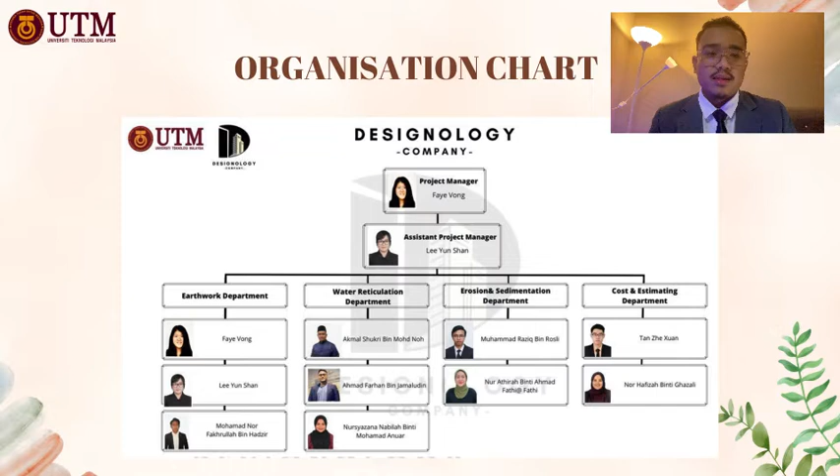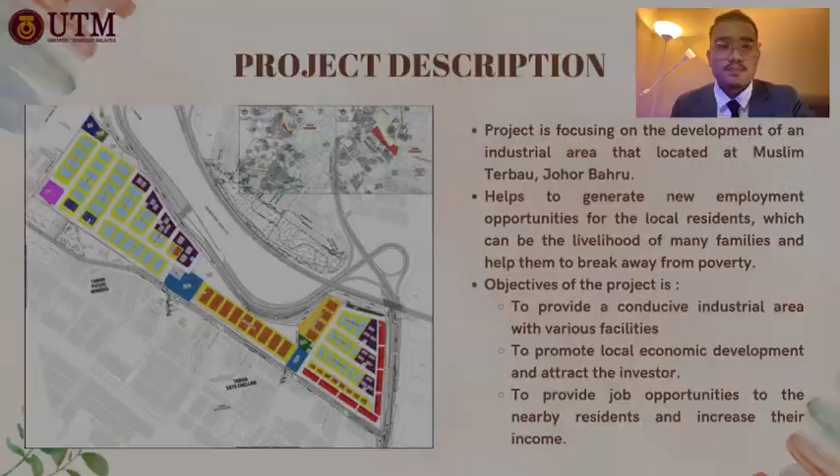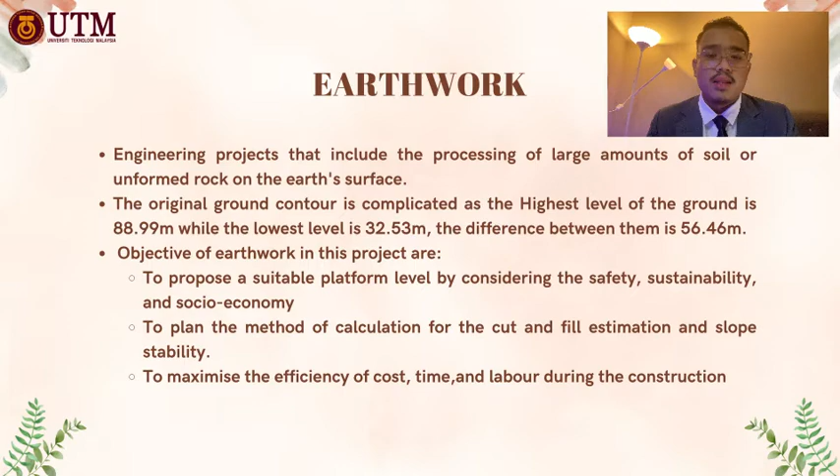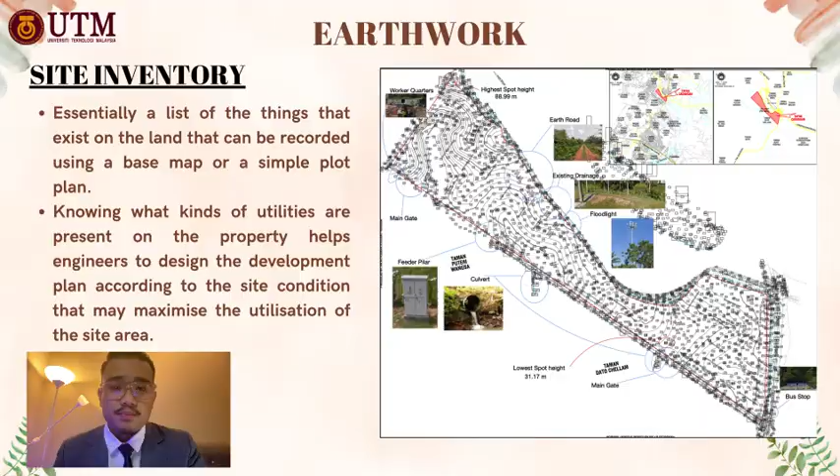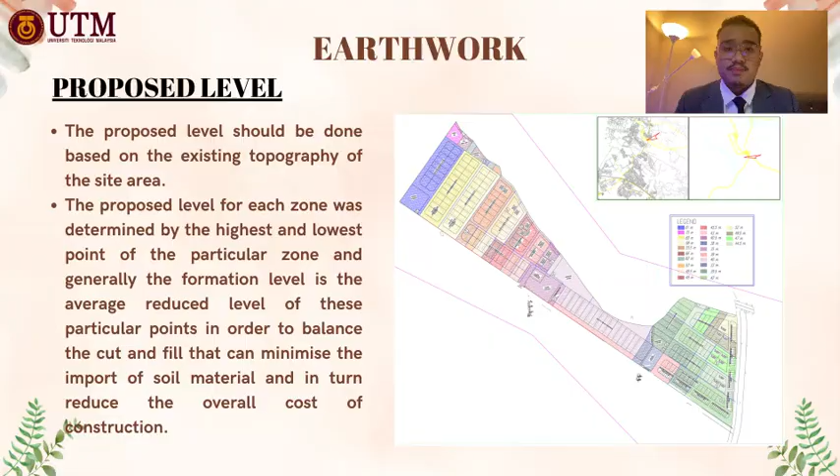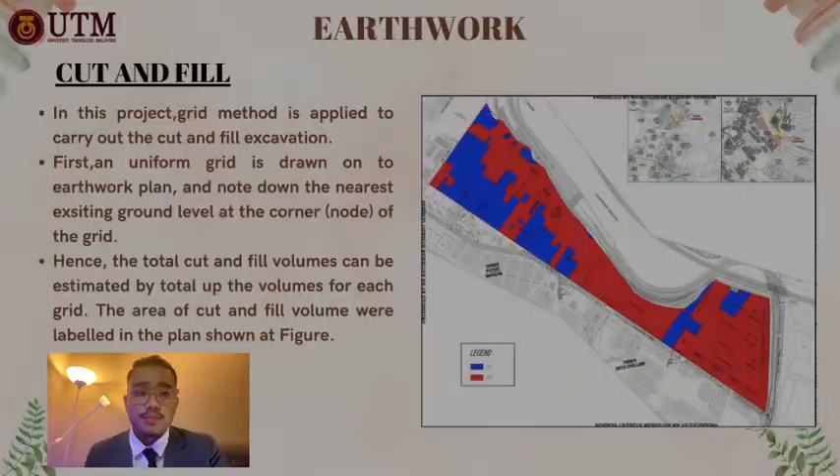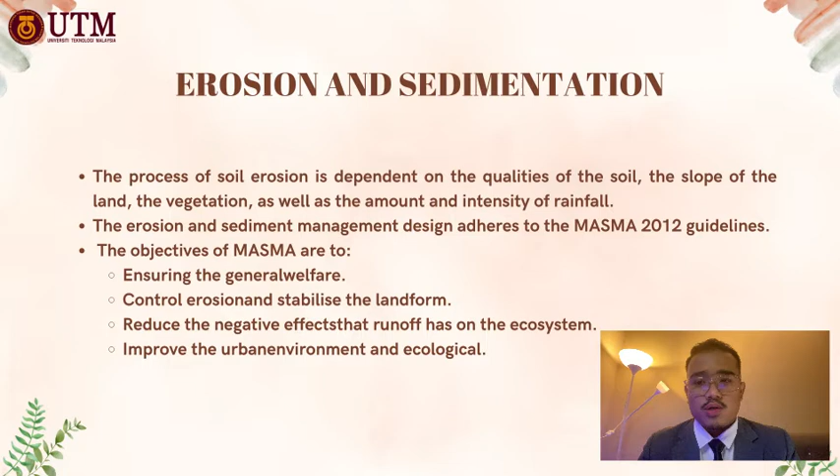The erosion and sediment management design adheres to the MASMA 2012 guidelines. The objectives of MASMA are to ensure general welfare, control erosion and stabilize the landform, reduce the negative effect that runoff has on the ecosystem, and improve the urban environment and ecology.

Temporary earth drainage design: a temporary earth drain shall be created prior to the start of earthwork to transport surface runoff water to a sediment basin or silt trap before discharge to the nearest public drain or river. The earth drain design should be suitable to prevent flooding. Depending on the geography and condition of the site, the actual drainage arrangement will be revised as needed.

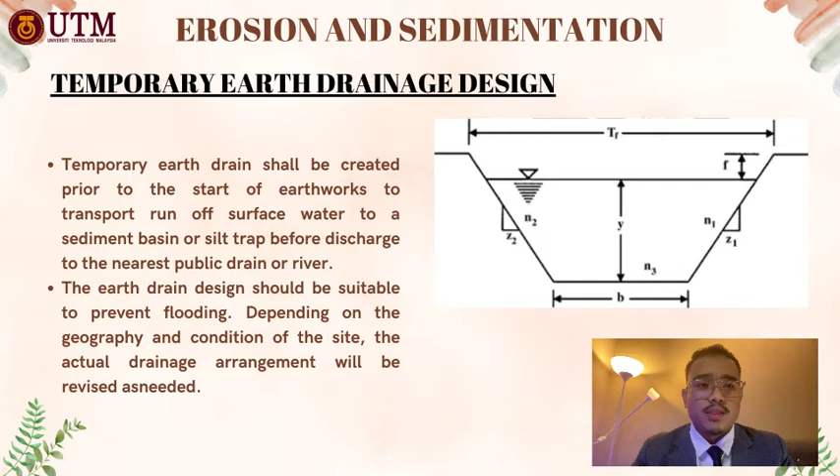Here is the layout for the temporary drainage. For sediment control, this construction site has a sediment basin, silt barrier and rock check dam. BMP for sediment control captures sediment on site and minimizes off-site transport.

It is necessary to place the sedimentation basin, also known as a sediment trap, downstream in order to catch the sediment conveyed by the temporary drainage system. In order to meet the demand on site, this must be meticulously planned.

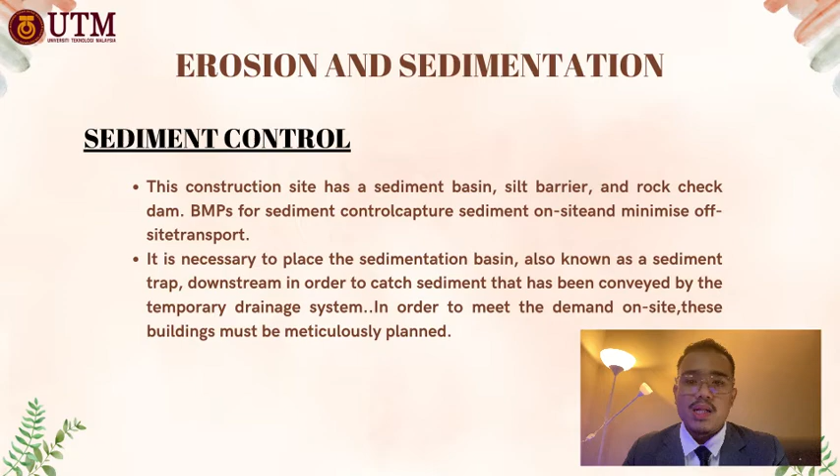For sediment yield estimation, the term sediment yield refers to the amount of sediment anticipated to be present at the termination point of the drainage system coming from the designated site. The outcome of this estimation is used to forecast the required quantity of sediment for sizing sediment control BMPs, as well as their ongoing maintenance.

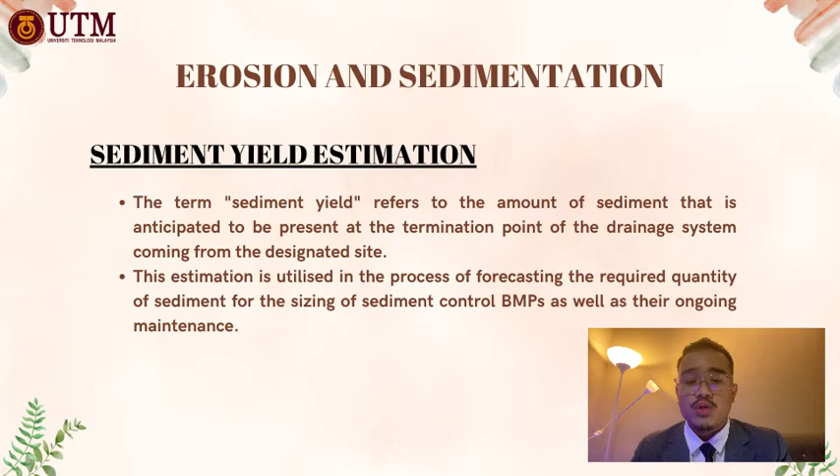For the sediment basin: a sediment basin is an ephemeral pond formed on a building site to catch eroded or disturbed soil during rainstorms and safeguard a nearby stream, lake, river or bay.

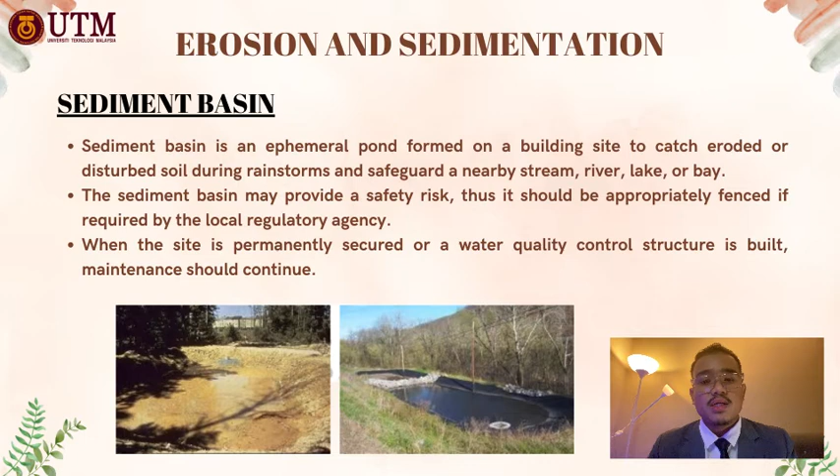The sediment basin may pose a safety risk, thus it should be appropriately fenced if required by the local regulatory agency. Maintenance should be continued until the site is permanently secured or a water quality control structure is built.

Now we move to the last department: cost and estimating. A project can only be completed with all the required material and labor, which costs money. It can be difficult to create a budget that minimizes costs while maximizing project quality and scope.

The objectives of cost and estimating in this project are to estimate the required total cost for earthwork, to work on an economical budget after applying value engineering, and to provide detail on equipment, machinery used, and the total labor for earthwork.

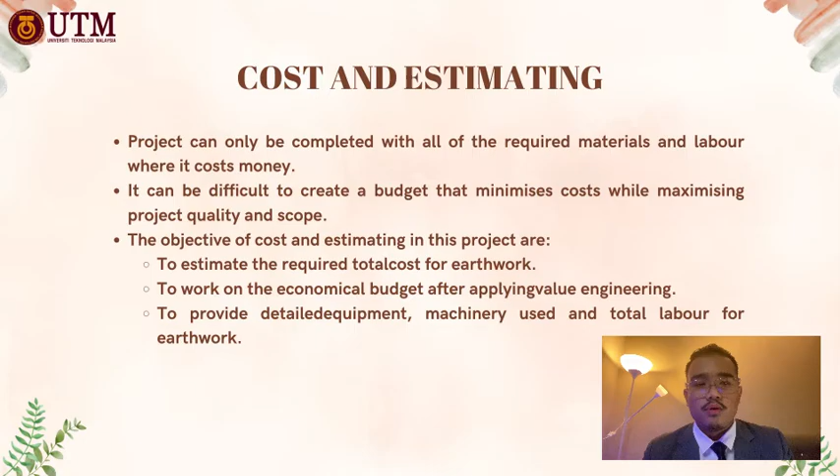In this cost and estimating section, we have a few parts, starting with site clearing. The site must be cleared before any construction work takes part. The clearing process includes grubbing, scrubbing, demolishing existing structures, and removing old underground infrastructure, trees, vegetation and other obstacles present on the site if necessary.

Cutting is where soil or rock from the relative rise along a route is removed. Trimming and forming a bank shall be done to the profile as shown on the drawing, as directed.

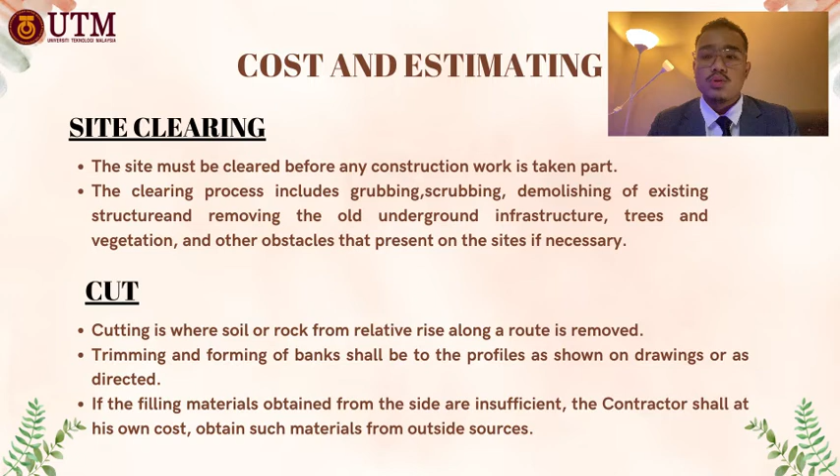If the filling material obtained from the site is insufficient, the contractor shall, at his own cost, obtain such material from outside sources. For fill, only suitable materials such as medium stiff clay, clayey sand, or other approved soil shall be used during filling. For areas to be turfed, the formation level shall be completed to an appropriate level below the finished level indicated, allowing for placement of topsoil and turf.

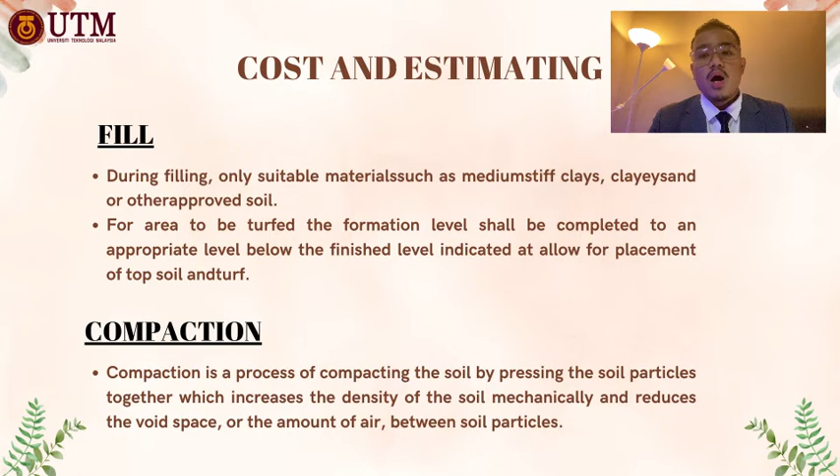Compaction is the process of compacting the soil by pressing the soil particles together, which increases the density of the soil mechanically and reduces the void space, or the amount of air between soil particles.

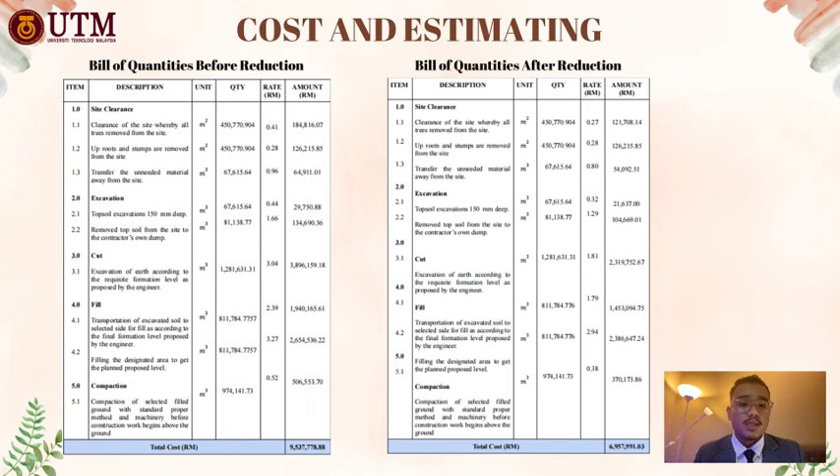Here is the summary for the cost and estimating. Businesses use cost reduction to cut costs while increasing profit. The cost cutting strategy may vary and be unique depending on the company. To be more specific, cost savings are more closely related to the amount of cut and fill.

The area assigned to our group has been updated and we have made some improvements to reduce the earthwork costs. After consideration of the overall amount of the platform level, we managed to achieve an overall cost reduction from 9,537,778 ringgit to 6,957,991 ringgit, making the percentage difference 27%.